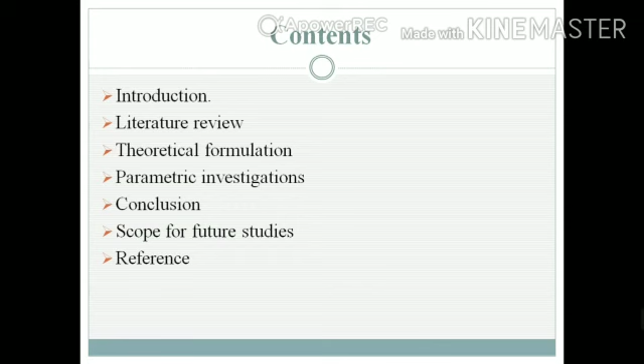Introduction. Today, due to increase in population, plastic waste is also increasing day by day. As plastic is non-biodegradable material, its disposal has become a very serious problem. 500 billion plastic bags are used annually worldwide. 1 million seabirds and 1 lakh marine mammals are killed in our oceans annually from plastic. To overcome these defects, we have thought to use waste plastic in construction sector, like by preparing plastic pavers.

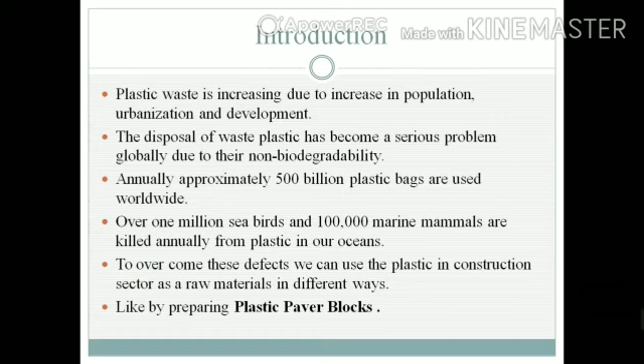Objectives of project: strength can be increased compared to conventional paver. It is economical. Waste plastic gets reduced. Waste plastic can be used as a binding material.

Advantages: plastic waste can be reused. Economical, durable and high strength can be achieved. High profit, eco-friendly, encourages entrepreneurs for setting business. Intensity of plastic gets reduced on earth.

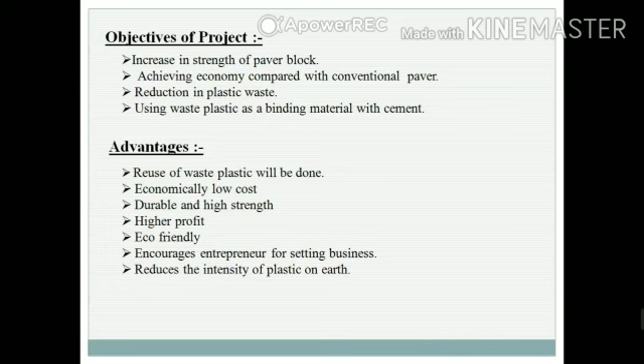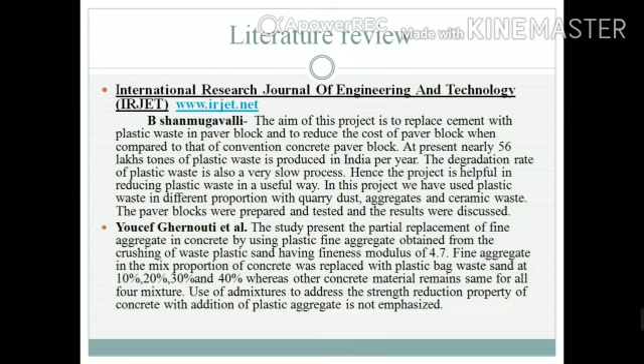Literature review: International Research Journal of Engineering and Technology, by B. Shanmugavalli. In this project, cement is replaced with plastic waste in paver blocks, and to reduce cost of paver blocks, they have used plastic waste, quarry dust, aggregate and ceramic waste. Youcef Ghernouti et al. in this project replaced fine aggregate by plastic fine aggregate in concrete of fineness modulus 4.7.

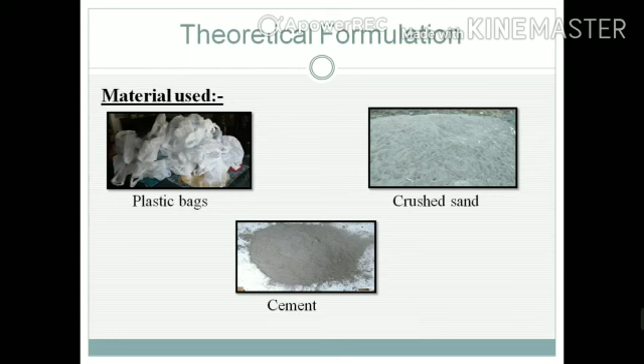Theoretical formulation: materials used are plastic bags, crushed sand and cement. Manufacturing process: first mixing preparation, second heating the mixture, third molding, fourth set, and fifth is market. In mixing preparation, the wetted plastic materials are dropped in the drum. The plastic waste are heated in the drum above 150 degrees Celsius.

As the plastic melts, crushed aggregate is added into the hot liquid. The aggregate added is mixed thoroughly using rod and trowel before it hardens. Second, heating the mixture: material should be mixed until the mixture becomes homogeneous.

Third, molding. The mold should be lubricated prior to use and then the mixture is poured into the mold. Prepare the mold by making sure it is very clean and well oiled. Fourth, set. Allow the hot mixture in the mold to set for a few minutes, repeatedly shaking the mold to loosen the edge. Keep trying to lift the mold.

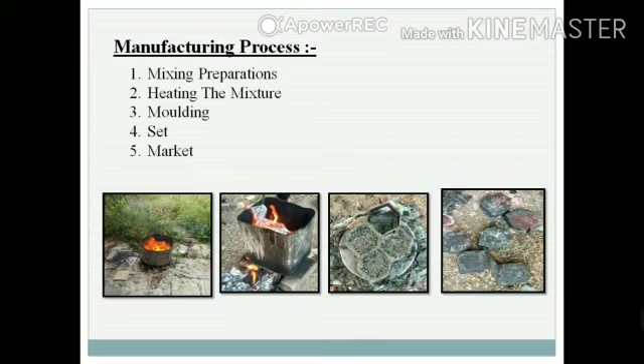Fifth, market. Tiles made in this way are as strong as concrete paving tiles. If you have your product tested and certified as an approved construction product, you will be able to market it to local building companies as well as directly to customers.

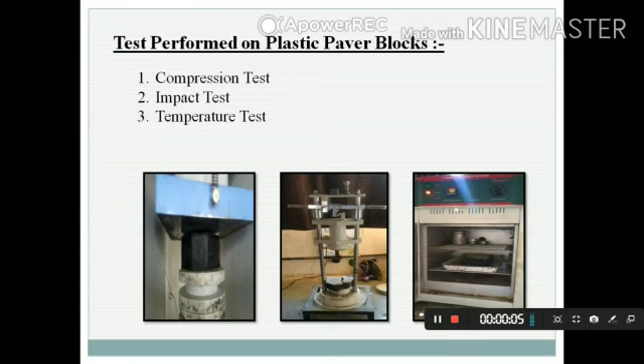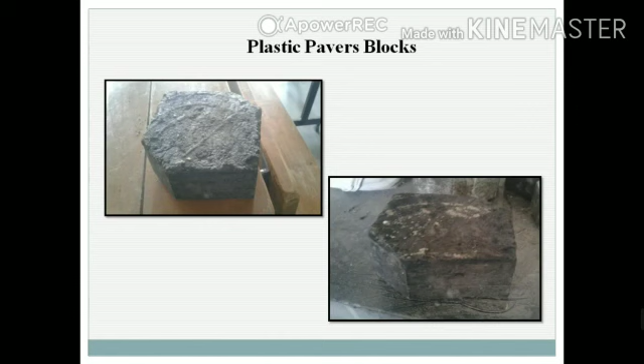For compression strength calculation, the equation used was ultimate load to area of cross section, and the maximum load at failure was taken. For calculation of impact value, the equation used was initial weight to final weight into 100.

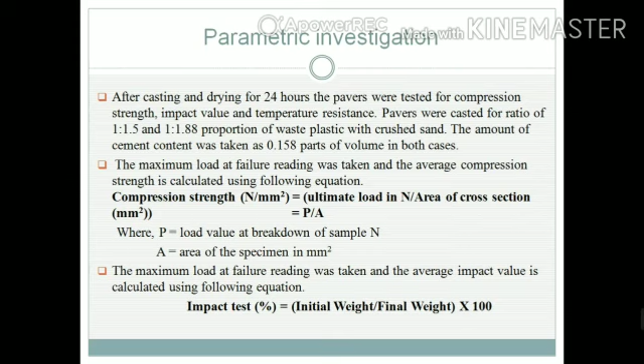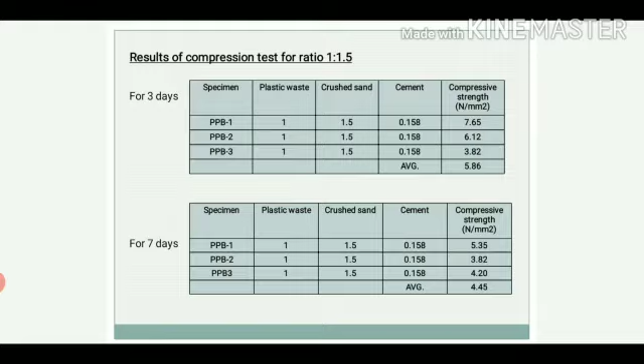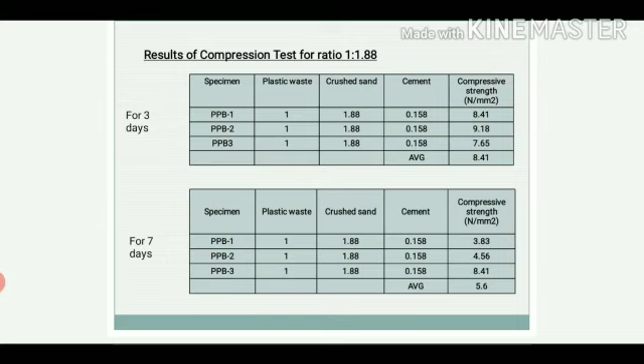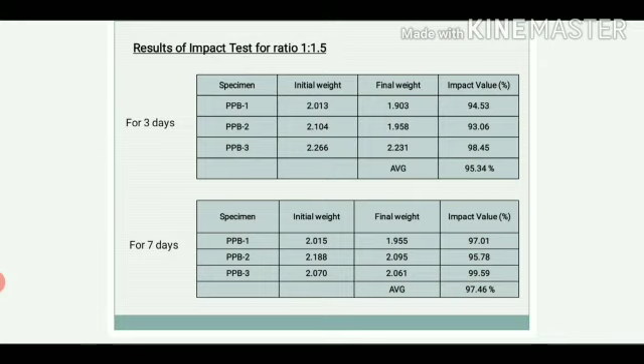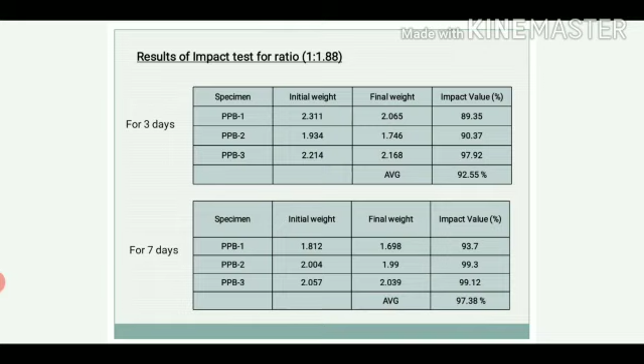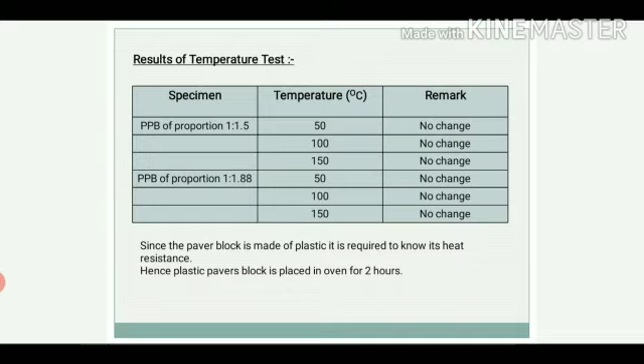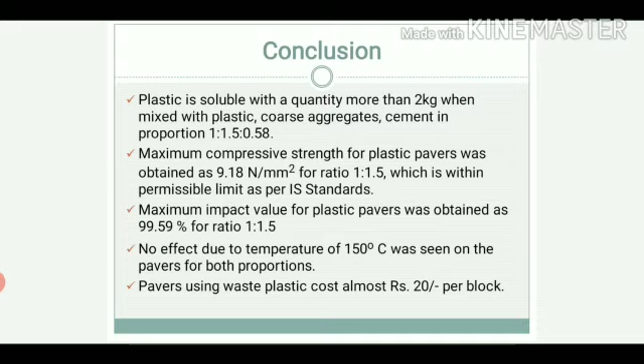Conclusion. Maximum compression strength for a plastic paver is within the permissible limit as per the IS standard. It is beneficial for the temperature test, no effect due to temperature up to 150 degrees Celsius. To minimize the waste plastic used to make the plastic paver, the results are permissible as per the IS standard. Plastic paver cost is less than concrete pavers.

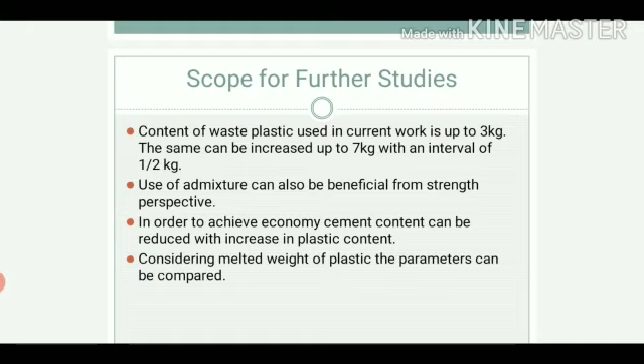Scope for further studies: using different admixtures can also be beneficial from a strength perspective. For economy purposes, we will decrease the cement content while increasing the plastic. Parameters can be compared with the melted weight of the plastic.